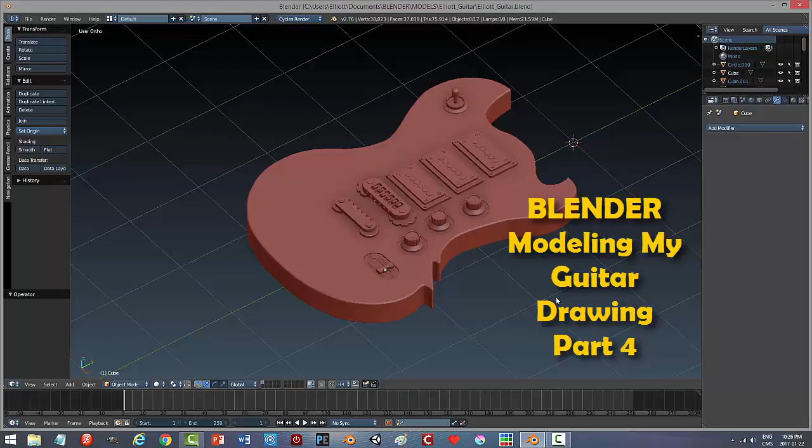This is part 4 of modeling my guitar drawing, and this is where we're at so far. I want to continue with a brief walkthrough, not so much a tutorial, since I'm somewhat of a beginner in Blender.

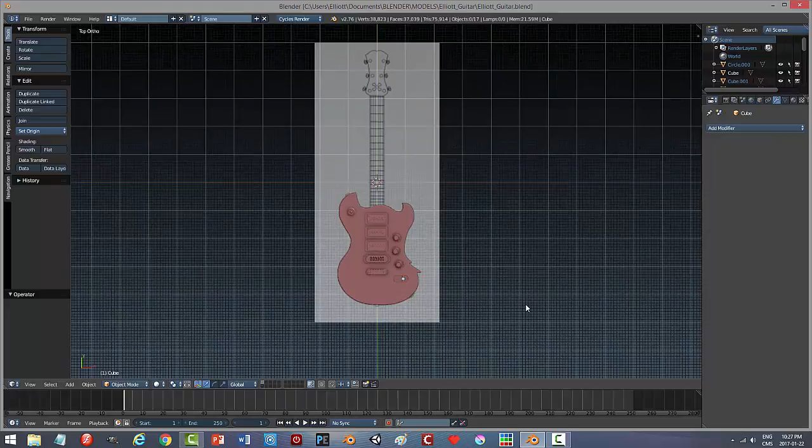So it wouldn't really be a tutorial, but for anyone interested in guitar modeling, this is my design. You might remember it from other parts. We're looking at this image I drew, and I'm trying to model that.

Here's where we're at so far. What I want to do right now, I'll show you. Let's go into wireframe mode. I'm going to do the strap peg and the guitar input here—pretty simple stuff.

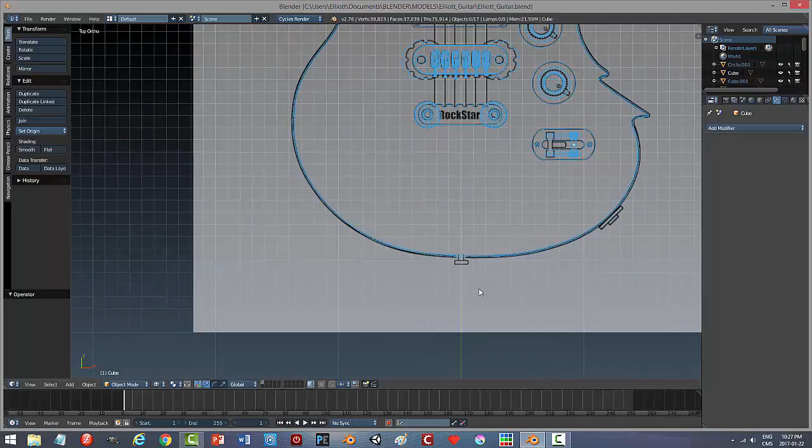For this I'm going to use a cylinder. Let's see if I can bring the cursor down to about there. I'll do Shift S, cursor to selected, which puts my 3D cursor there, so when I bring in a mesh it shows up there instead of somewhere else.

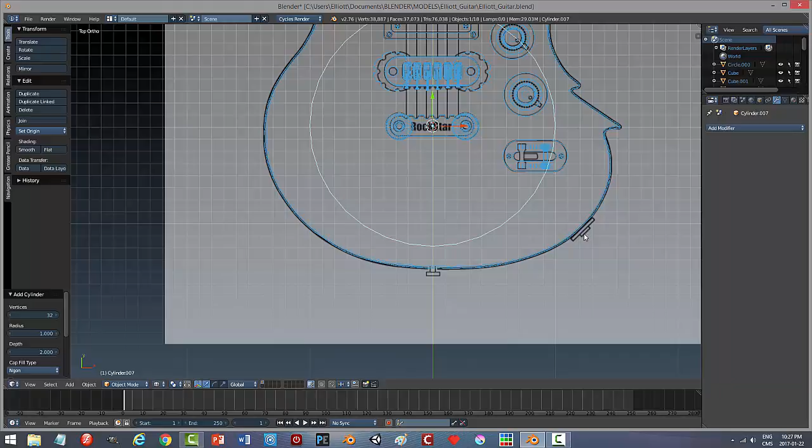That way it'll be easy to move it down. I'll do Shift A, choose a cylinder, 32 vertices, n-gons, no problem. I'll scale it down and rotate it in the X 90 degrees.

Then I'll start moving it down here. Let's zoom in—I press the period key to zoom right in. Scale it again until I get about that size. That's fine, and I might scale it in the Y a little bit.

So I'll have it protrude into the body, and then I'll make this section here. I think the way I'll do that—I don't really need to be in wireframe mode.

In edit mode, I'm going to put in an edge loop, maybe about here, like that. Then in face select mode I'll grab all these faces, and that one, and that one there, and extrude, then scale it but not in the Y.

So scale, Shift Y, so I can scale it out but not in the Y direction—it doesn't have to be the exact same size as my drawing. It could be something like that.

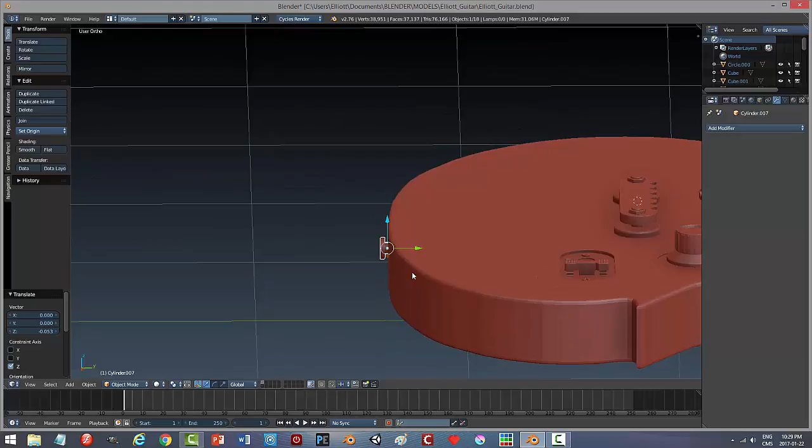Let's just have a look at what it looks like. First let's bring it down roughly in the middle of the guitar body, and I can bring it out a little bit, and we'll generally have a look.

Okay, so I'll make this a little bit bigger here. I'll grab that face and bring it out a little bit, and I think I'll go ahead and do some beveling on this.

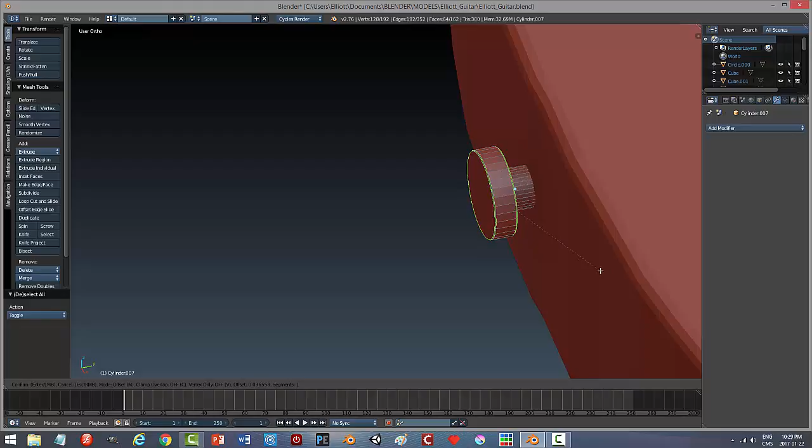Let's see if I can just grab this edge and that edge and Control B. I don't believe it's working the way I want it to be quite yet. Actually, yes it is—great, okay. I'll just put one segment by rolling my mouse up once. Accept that, come out and have a look.

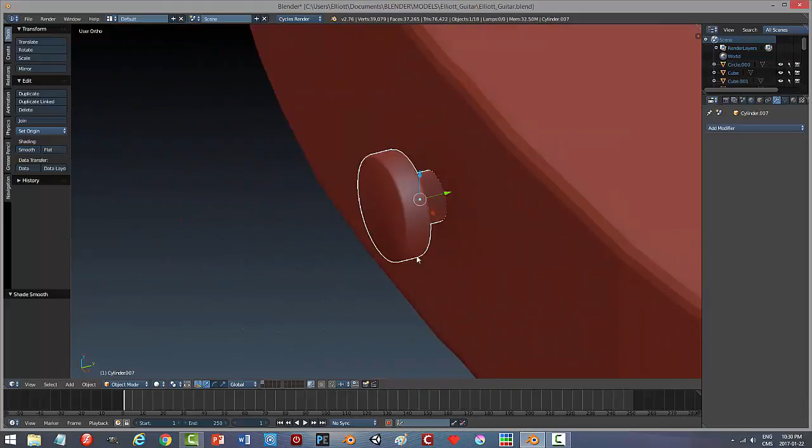Now this could be—I could look at that in smooth shading, and we might do that in a bit. I'll go on a little bit more, so back into this and back into face select.

Maybe I'll grab that face and hit I for inset, bring it in a little bit, and scale, Shift Y, just scale it in a bit more, then do an E to extrude and bring it in a little bit and scale, so we get something like that.

That's generally what it would look like. Now if I go ahead and hit smooth shading, it would look like that. But let me try adjusting this here.

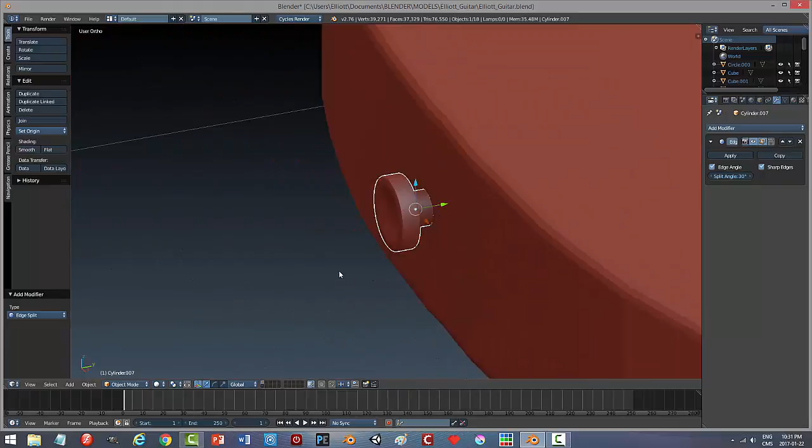That didn't really do exactly what I want, so I could try the edge split, and it ends up looking like that. It's not bad—I could maybe do a little bit more.

Come in here and put an edge ring there, up there, maybe put one down here, and see how she looks.

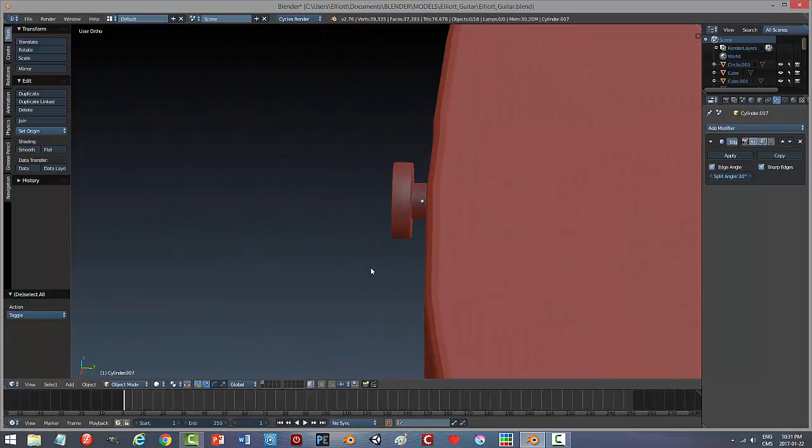Did I not bevel? If I didn't bevel this back edge, I think I should—or didn't I? Or did I?

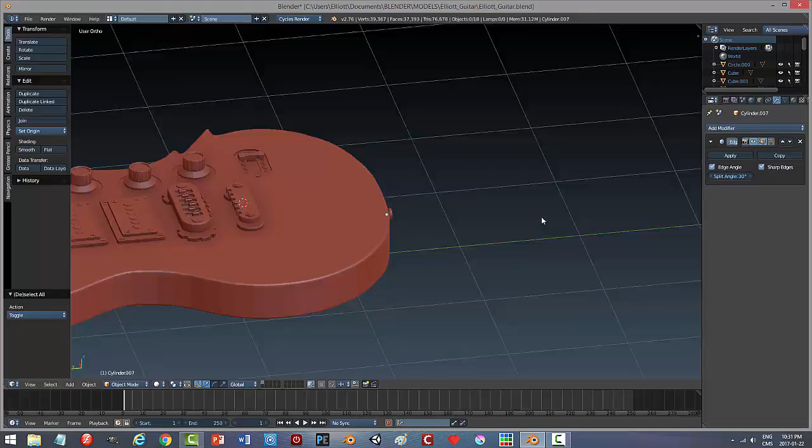All right, that looks fine—I mean, it's such a small piece. All right, so that would be my strap peg right there.

So I'm going to make a copy of that, or do I want to make it a bit bigger actually. I'm just going to scale in general. I'll pull it out, make sure it's long enough—yes, it is.

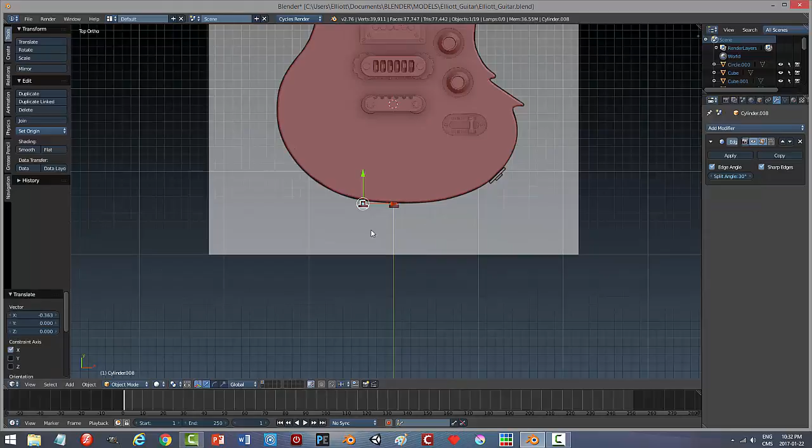All right, so Shift D to make a copy of it, and I'm going to bring this up. Oops, where'd it go? Bring it up here. Rotate in the Z.

And I'll try switching to normal—let's see if that works for me. It does. Rotate in the Z a little bit more.

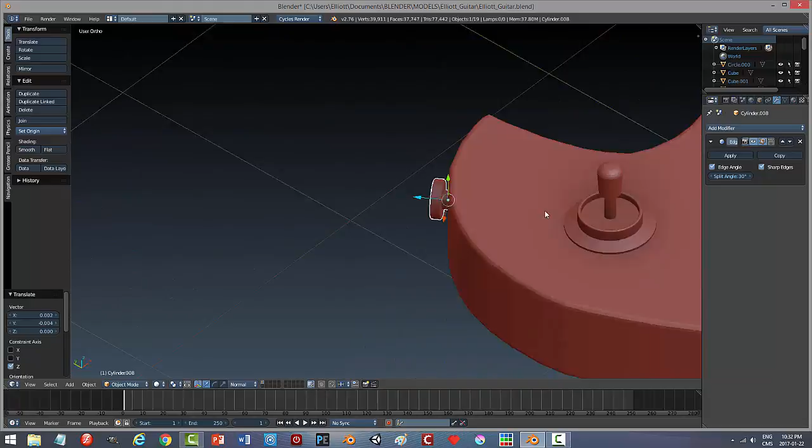Maybe I do want these a little bit bigger. Let's see what happens if I scale it, just to roughly match the diagram. It might look a little better. On the other hand, it looks a little bit too big. Let's just try it like that, the same size as the other one.

Okay, so those look fine for now. So I'm going to join those to the guitar body. Okay, so there's that part. Great, so it's coming along.

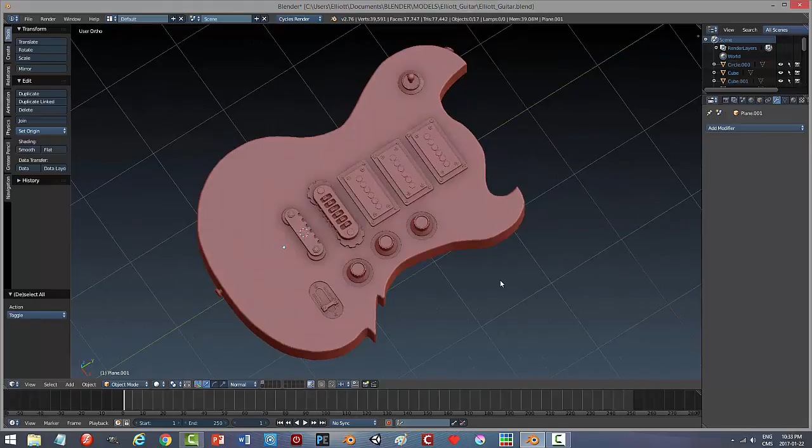Let's have a look at the next part. I wanted to do this now. I don't think I'm going to do it curved. I think I'm just going to do a straight piece and push it into the body. I just find it's going to be easier to do that, and it's going to look fine.

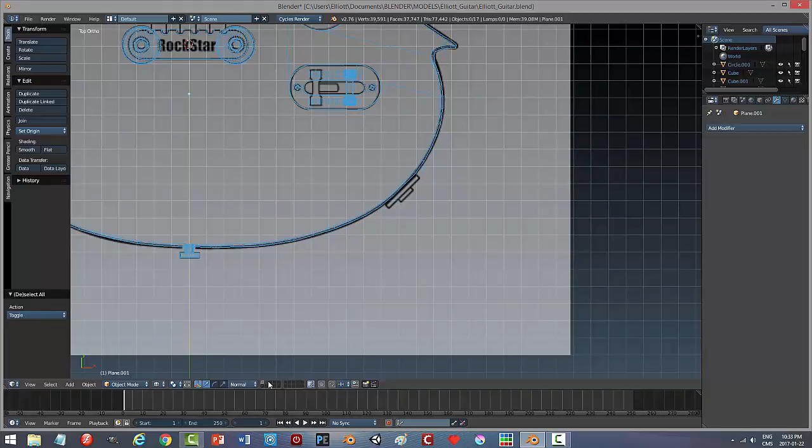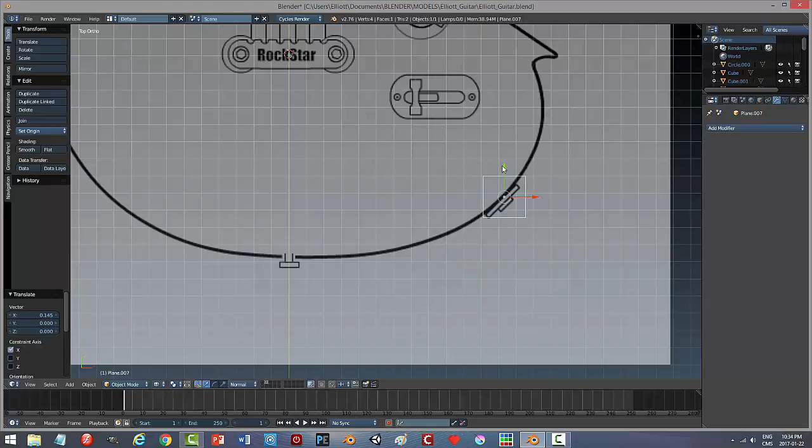So what I'll do is I'm just going to come to another layer here. Shift A to create a plane. I don't really need to move it around, but just to get a sense of the size, something like that, something I can work with initially.

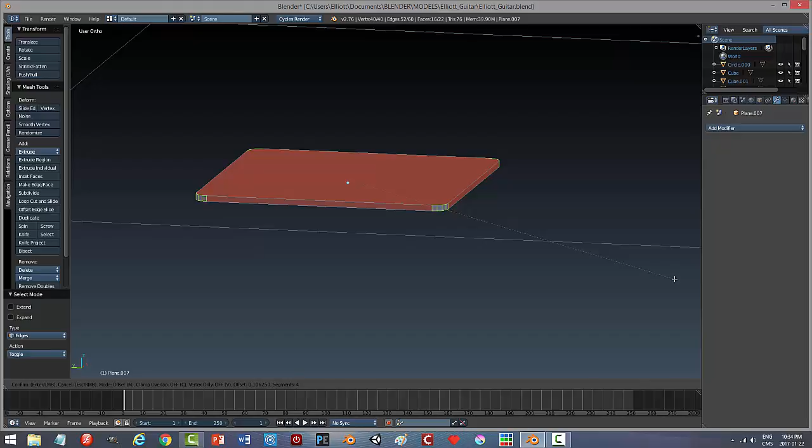So that's going to be it. Now I'll go into edit mode, select that face, E to extrude, bring it up, not too thick. That's good. Edge select mode, I'm going to grab all the edges at the four corners, and then I'm going to go Control B, pull back. Okay, 1, 2, 3. And that's my rounded plate right there.

Let's look down on that. All right. And now I'm going to do the jack input part. I think the way that I'll do that is I'll make sure that my 3D cursor is right there.

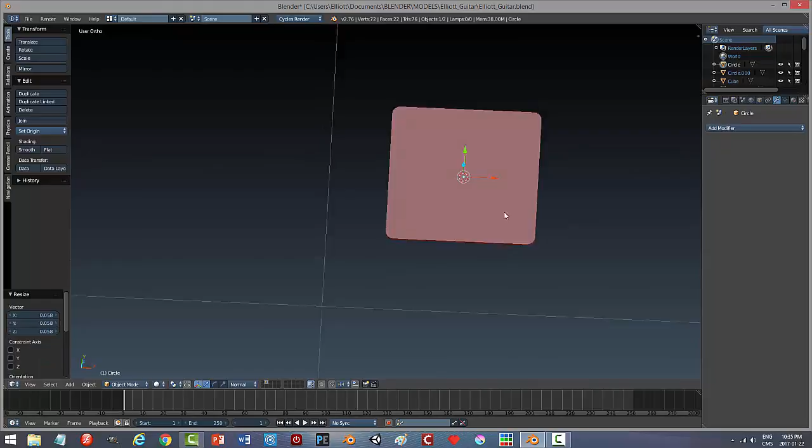And I'm going to bring in, let's say, a circle. Bring in a circle, scale it down, and bring it up. All right, so it's going to be there. So edit that, hit F to make a face, E to extrude, and bring it up just a little bit. All right, we'll just go back into global.

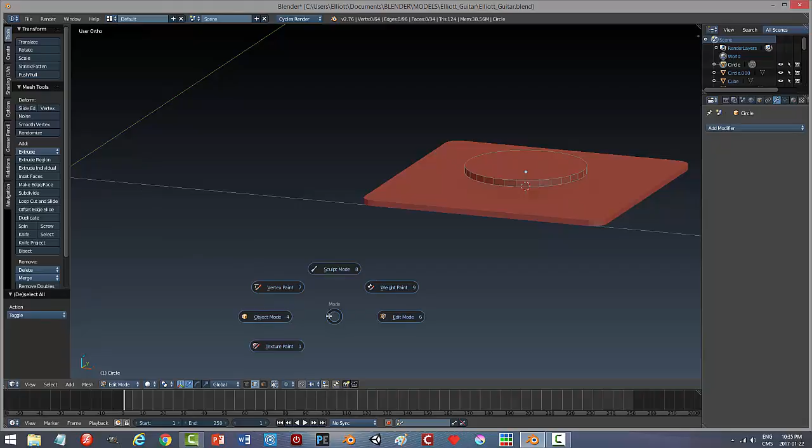Make sure my normals are calculated to the outside. Rotation and scale. Now this is going to fit in the middle here, a little bit in, and then I'm going to do a little bit more work with this.

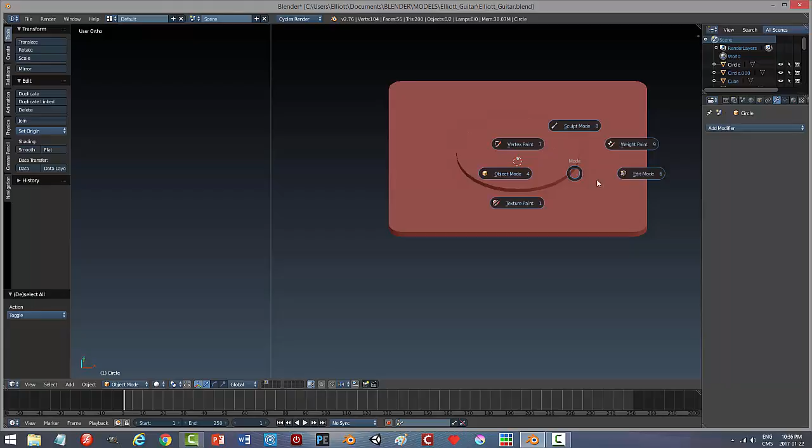Yeah, this is going to form a central tube, the actual input for the guitar, and I'm not going to drill this through and into the guitar. You'll see what I'm going to do. So I'm going to go E to extrude, S, Shift Z, I think.

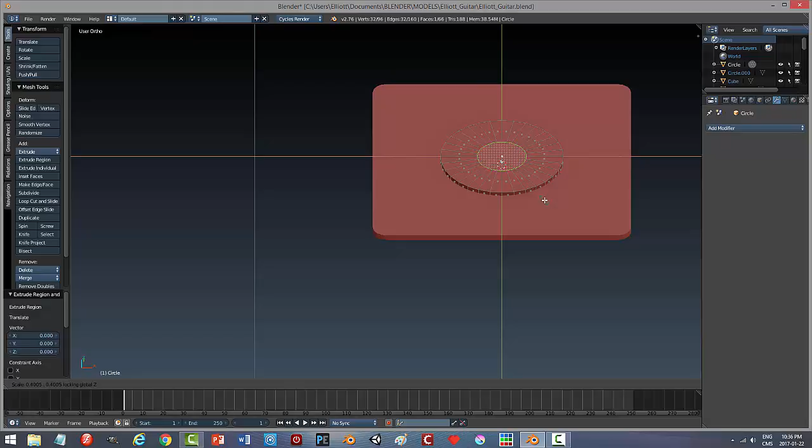Okay, so I'm going to make just a central sort of hole here. You'll see what I mean. Extrude, and I'm going to bring this up. Not too far. I can always adjust this later.

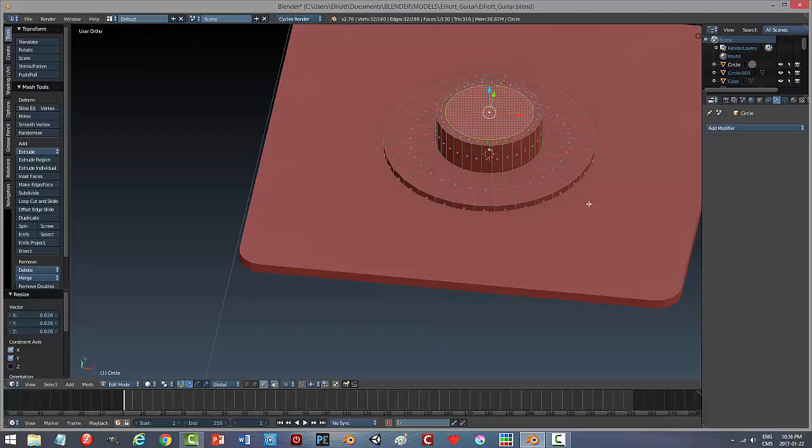And then I'm going to inset. No, I'm not. I'll go extrude, scale, shift Z, just bring it in a little bit. And then I'm just going to tunnel this down, extrude, and push it down in the Z direction, just like that. All right, so that would be the beginning of that, and I'll bevel this, and then I'm going to do a bolt around this, and that would be it, and then some screws or whatever there.

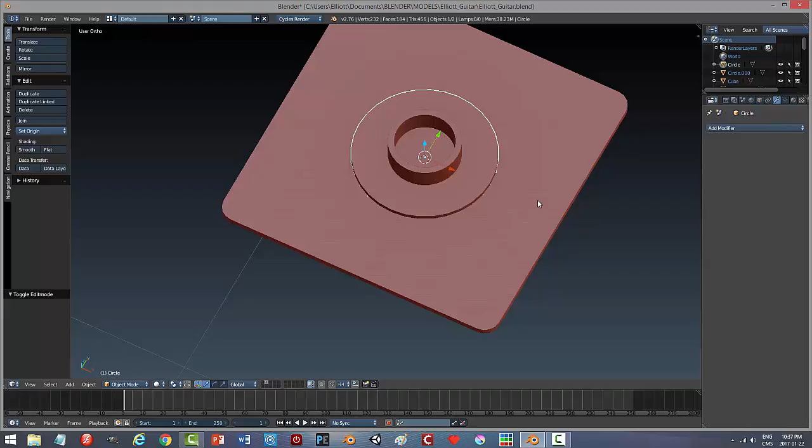So I will leave that for the moment. 3D cursor is already there. So now I'm going to make that a hexagonal bolt, and what I'll do is I'll use a cylinder with 6 sides, scale it down.

And the idea would be just to sort of push this down, okay, but get the size right, something like that, and that would be the input there. So we can just scale this in the Z.

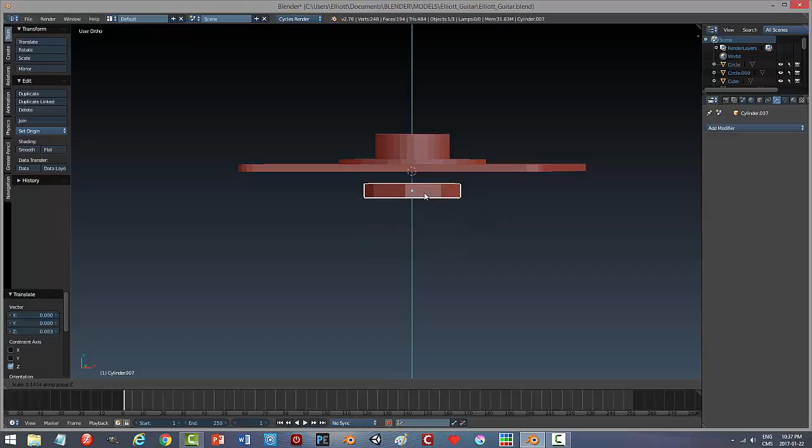And while I'm at it, I can get rid of that bottom face there. I haven't been doing that very much. I've been forgetting to do that. But that would basically go, you know, something like that.

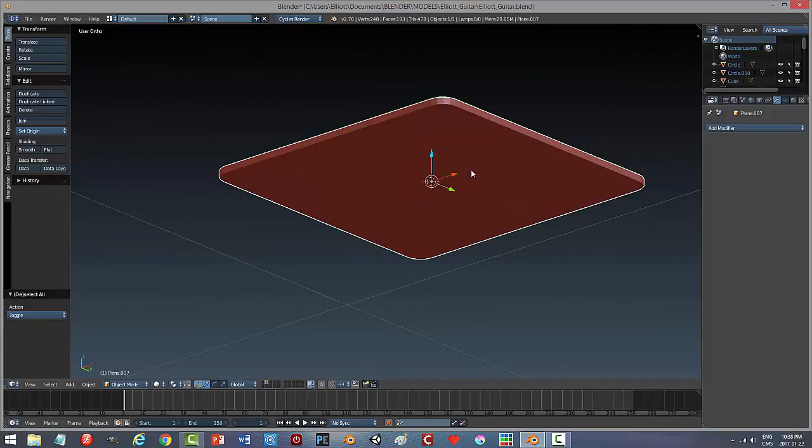Hopefully that's big enough. Maybe this is too tall, so I'll adjust that as well. I'll also get rid of the back face on this. I won't be needing that. Whoops, I thought I could select that for some reason. That's this piece. I will get rid of the back face on that as well.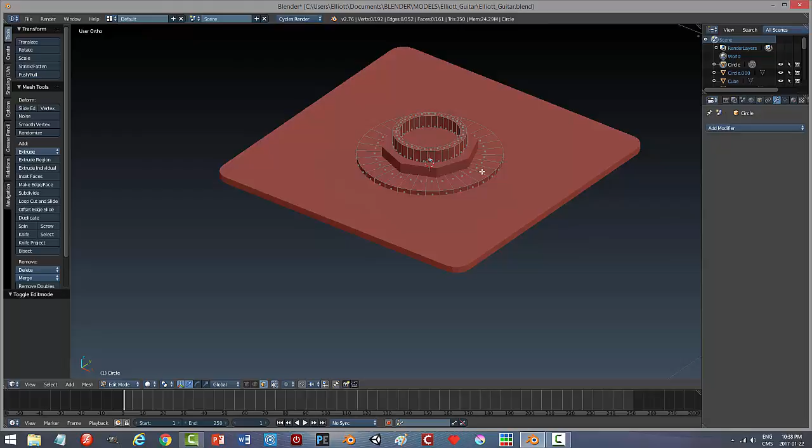And this guy here, yeah, it's the same piece, right? So what I'll do, I'll bring it down. Okay, so I'm going to select these polys, and I'll just pull this down. Now I want to do some work with this.

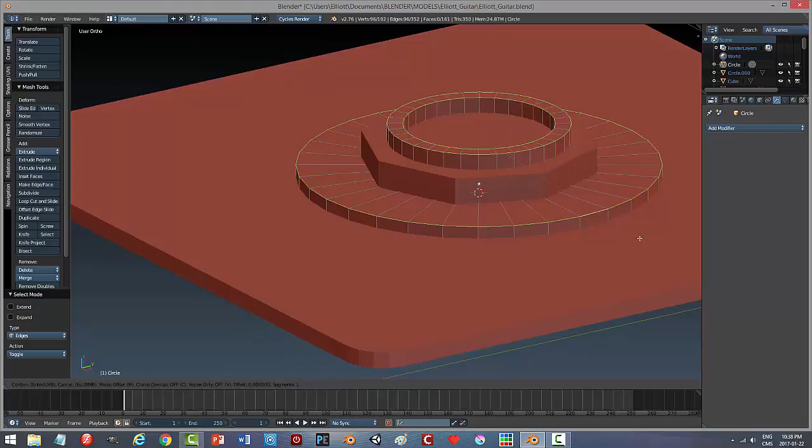I want to bevel this, so I'm going to select that edge and this edge. Control B and pull back with my mouse. Roll up with the wheel 1, and that is it for that.

I'm going to do the same thing to this bolt here. I'm just going to select this top edge. Control B. And is it working? No, as you can see, it's just going over the top. So I need to make sure all my normals are calculated outside, and then rotate and scale, or probably just scale.

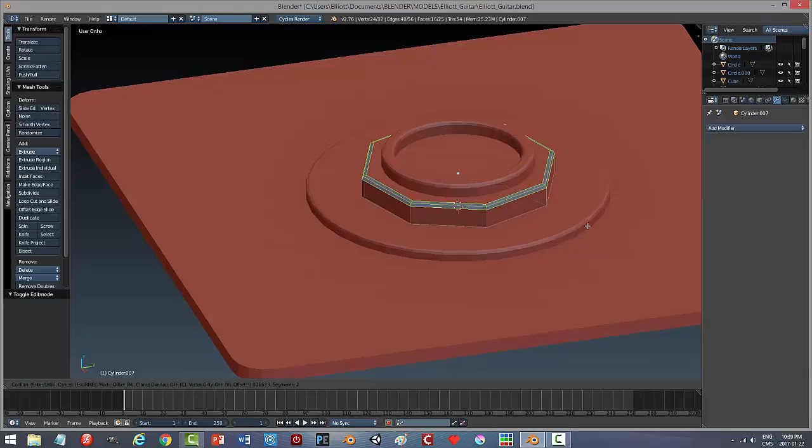So let's try this again in edge mode. Select that, Control B, and now it gets the side as well. I'll give it 2 segments there. I don't need it to be too big. That'll give it a little bevel to catch some light, and that is that section right there.

Maybe it's sticking out a little bit much. We'll try that. All right, so again, I'm not going to drill this in through here and into the guitar.

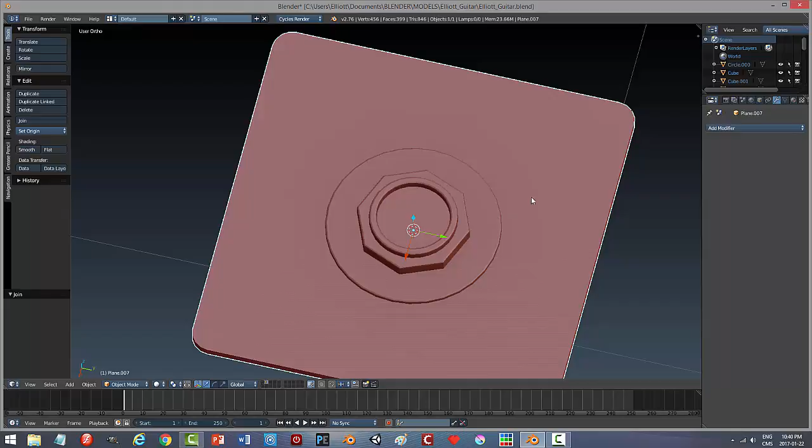It's just sort of a static piece, and it's going to look like that. Is it going to be big enough? Yeah, I think so. When I put the bolts in there, that'll be it. So I could go ahead and connect all of this stuff to this piece, and yeah, I'll make some bolts.

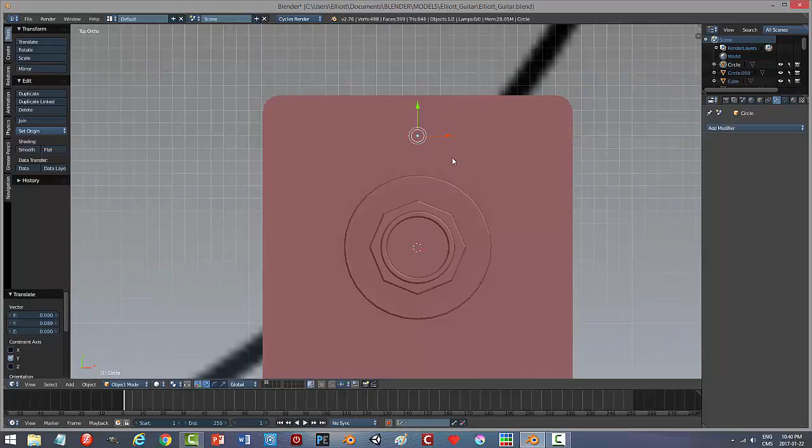So let's just go ahead and go Shift A, add a circle, scale it down, and bring it up. And in top mode, scale it down quite a bit more, and I'll bring it into a position in the corner here. So imagine that there's a screw or a bolt there. All right, and maybe I'll make it a little bit bigger.

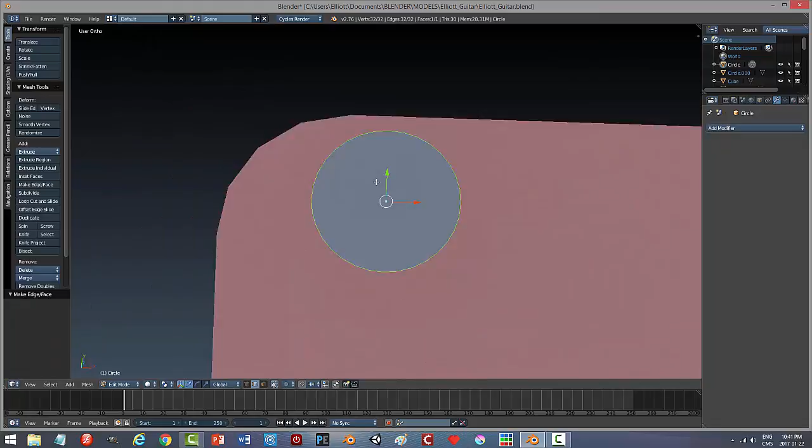Okay, edit mode, face, extrude, bring it up, something like that. And let's go ahead and move this down to the surface, something like that. All right, so now I want to make this into a screw.

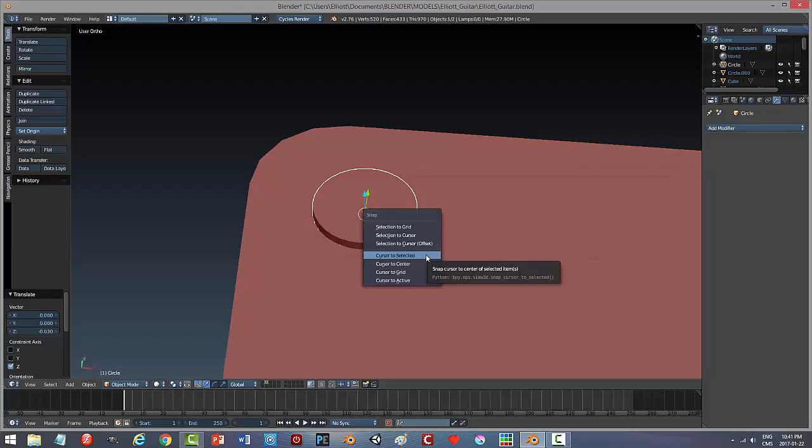So I will go Shift S, cursor to selected, then bring the 3D cursor there, and add a cube. Okay, scale it in the Y. That kind of thing. Scale in the Z.

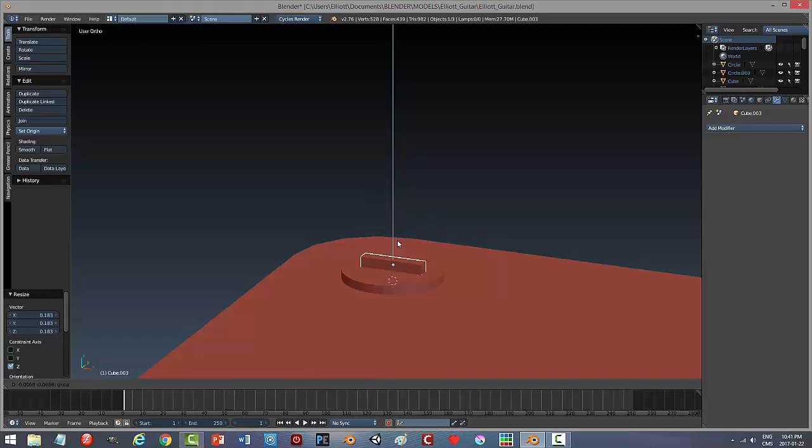And I'll use this as a cutting tool. I'm going to cut into this. I'll go ahead and Shift D, rotate Z 90, and join these pieces. And likely I am going to have to do some work on this. So I'll go normals, recalculate outside, and that.

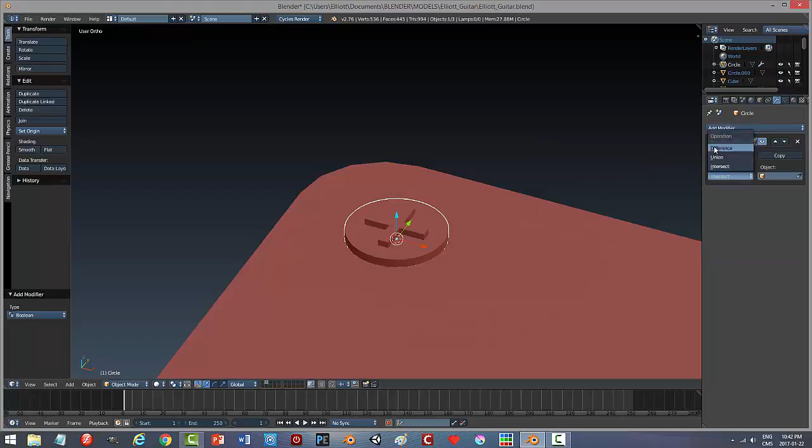Okay, so this is going to cut in. I don't need it to go that deep, so I'm going to choose this Boolean difference for my cutting tool, apply, move that out of the way. I'm going to delete this, I don't need it anymore. And that's what we have so far.

I'm going to go into edit mode. And as always, I want to bevel this. So I'm going to choose all these inner edges and this outer edge, all of it. And then Control B, pull back on my mouse.

No, it's not working quite yet. So as soon as I see that, I'll come out and I'll try rotation and scale and see if that was enough to make it work. Control B, and yes, it was. And I'll just come down a bit and I'll give it one segment.

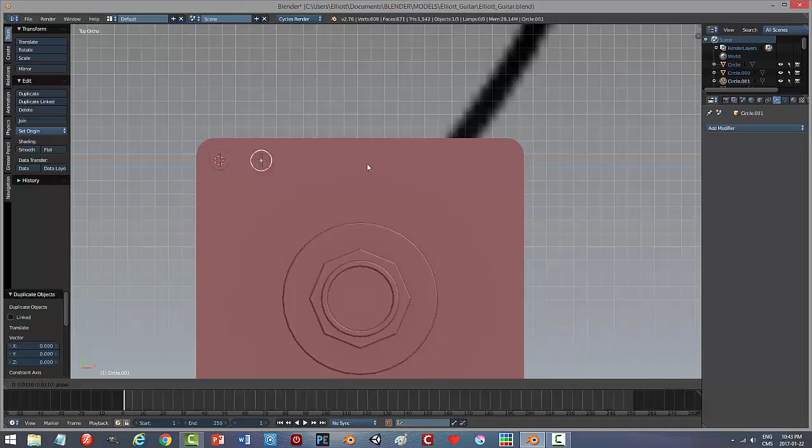Okay, around there. Deselect, and that's my screw. All right, so I'll now take it and Shift D, copy it over to here. Shift D, copy them down here. Get all of these and that, Control J, and it's all one piece now.

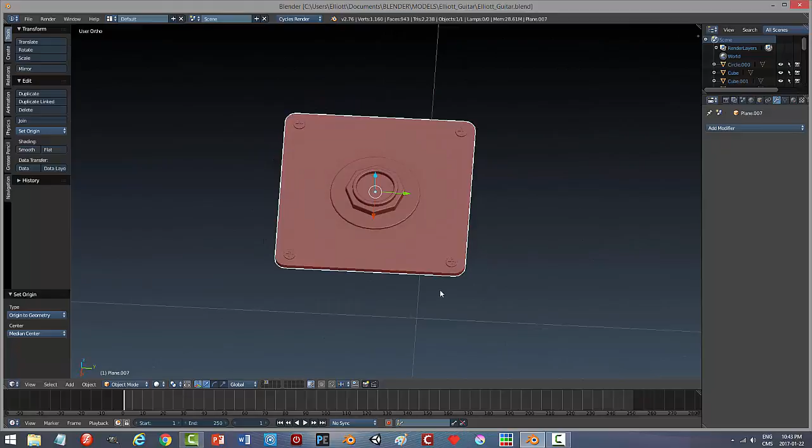I can move that back to the center, just get it out of the way and make sure we've got origin to geometry. So there you go. There's the plate, nothing fancy or anything. Let's move this now back to the first layer and position it on the guitar.

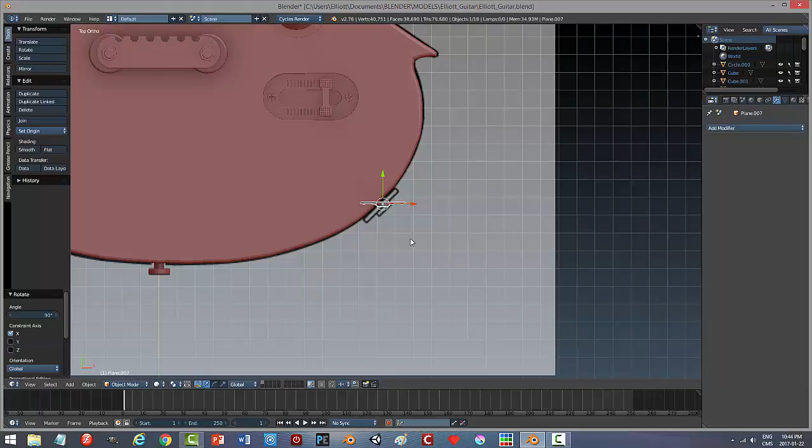So we need to rotate this. Actually, I'm not necessarily going to do that. Let's just go rotate X 90. Let's do that first and then look at the top. Okay, here we go. Okay, I'm going to rotate in the Z,

just to sort of match the contour of the guitar. I believe I can now do this. Rotate the Z. And it's not going to be perfect or anything. Something like that. But let's move it down.

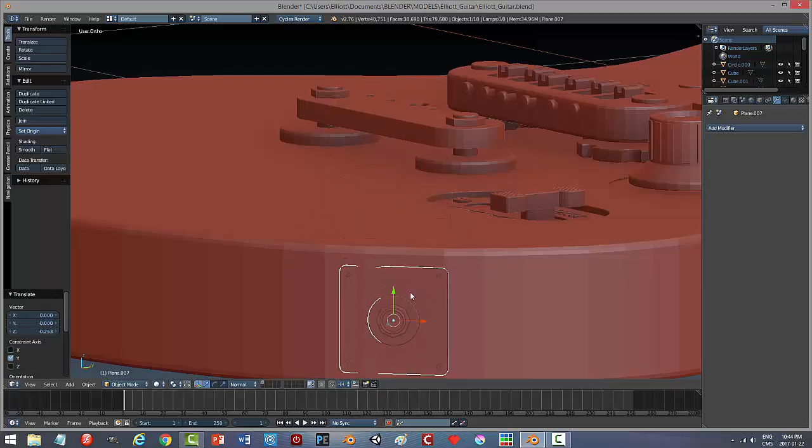And then we'll move it out if necessary. And we may even slide it along the guitar a bit to find a good position for it. But it's just basically going to sit there like that. All right, I'm not going to bend it or anything. I just want it to be kind of even. That's not bad.

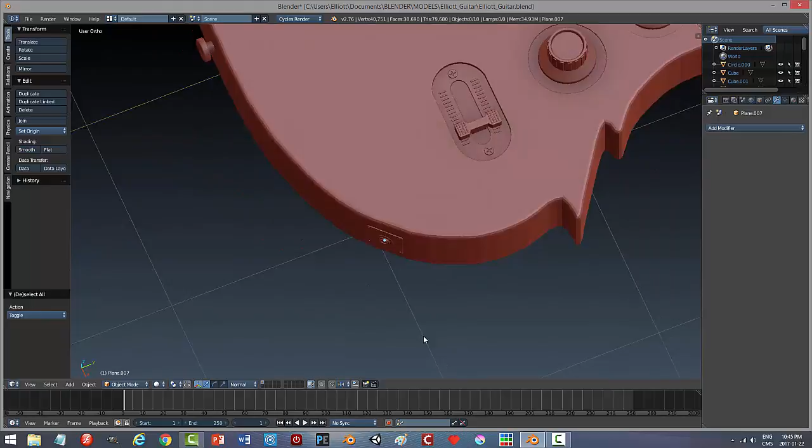All right, maybe it is a bit big, so scale it down like that. Okay, we'll come back in. I'll make sure it's as close as I can get it. I think it probably is if I want it to stick out even just a little bit and catch some light. But that's all that would be involved with that.

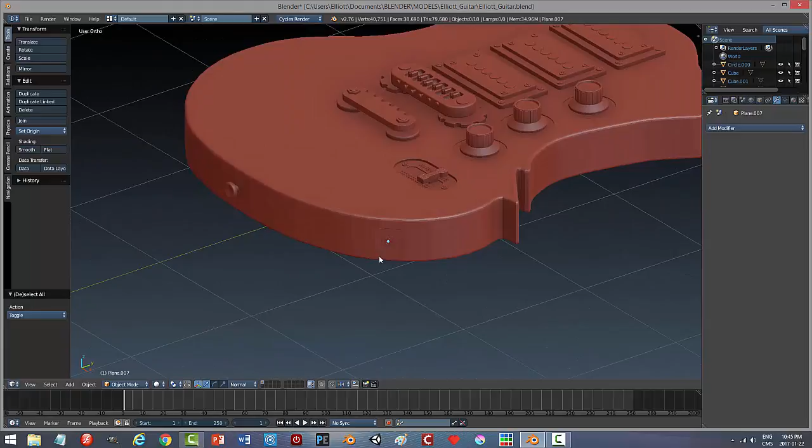So in this video, I really haven't done that much. I've just added the strap pegs and that. Let's have a look at it in another material. Okay, as we get ready to continue with some more. Okay, so that's going to be it.

Actually, you know what? The more I think about it, the more I realize I've wanted to change something for a long time, and maybe I'll just get it done. I don't want this screw to stick out that much. So I think what I'll do, and I don't care if it looks exactly like they're in the right positions, what I'll do is I'll try to do this.

Control plus to expand my selection. Okay, I went too far there. I'm going to go minus to come back. So I should have got this whole head region. I just want to push this in.

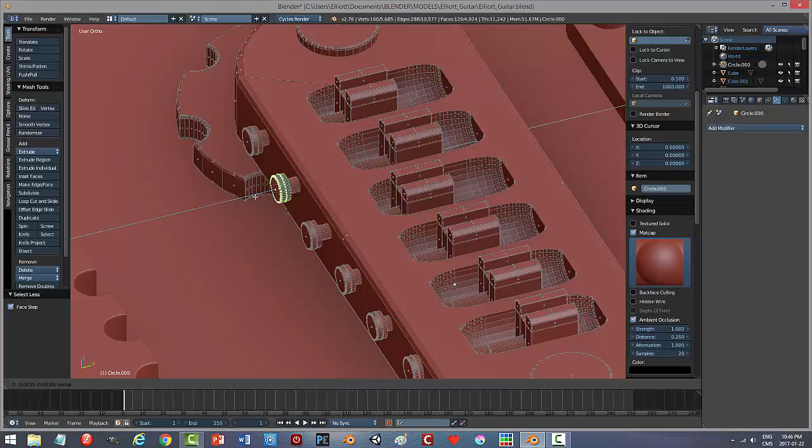And again, I don't care if it seems like the screw's in far, but this is the back. I don't think anyone's really going to look at that. I actually think it looks better if I manipulate a bunch of these. Okay, I'm just going to put them at somewhat random positions. Something like that. All right, so already, I think it looks better.

Maybe this one is still out too far. All right, but it's hardly noticeable. Okay, so that's where we're at so far. So thanks for watching.